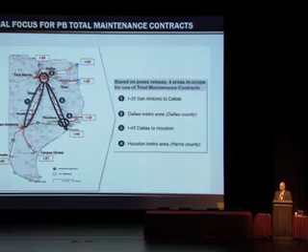I want to bring you up to date on where we're at with our performance-based total highway maintenance contracts. This is the initial focus area based on a joint TxDOT McKinsey study on which highways and areas TxDOT is going to put under performance-based contracting for routine maintenance on highways.

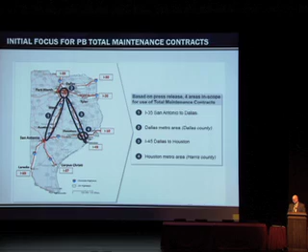You'll see from the bottom right, you're starting off in the Houston metro area, then going up north towards Dallas on Interstate 45, then the Dallas metro area, and then down towards San Antonio on the I-35 area.

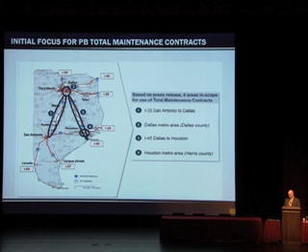This is just a little bit different map. Okay, just to tell you, if you're not aware, we have this section of Interstate 35 that's been under contract.

I believe it's on its third generation since 1999. This is the current contract in Austin, Interstate 35 through the district boundaries, a short section of 290, State Highway 71, Loop 1 or MOPAC, and US 183.

San Antonio metro area will take care of Interstate 35 through the district boundaries, and then basically all the major roadways and thoroughfares within

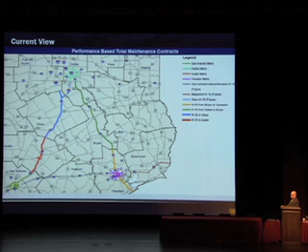Loop 410. Over here we've got a potential project on Interstate 10 from San Antonio over to almost Houston, possibly all the way to Houston. We have a current contract in Houston for all the major metro areas within Beltway 8.

This yellowish area is Interstate 45. It was a current contract that went under contract, I believe, in August 2012. And then we have this Interstate 45 up to Dallas I spoke of earlier, and the major thoroughfares within Dallas County up there in the Dallas area.

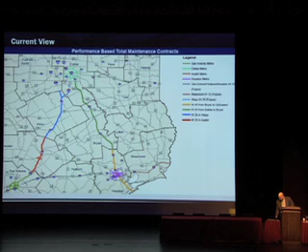In Austin, we let the contract in the metro area in December of 2013. We had, I already explained, the different roadways. This section, if you can see it well enough, there's a section of roadway under contract right now on MOPAC. So not all of that is in the routine maintenance provision of the contract.

It is a CTRMA MOPAC improvement project that's going underway. So the southern section of MOPAC is within this contract, but it was let in December of 2013. ISI Contracting got the low bid of about $11.4 million of the 4 bids received, 19% plus under the engineer's estimate, and $4 million under the second bidder. Work started on that in April of 2014.

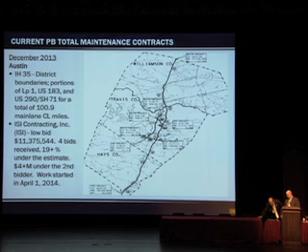January 2014, we let the Houston project, everything inside Beltway 8. Texas Tree and Landscape got that low bid. Of the 3 bids received, 14+% under the engineer's estimate, $6 million under the second bidder, and work started on

June 1st. Subsequent to the letting process, Texas Tree and Landscape -- a lot of y'all may have heard about this happening throughout the state -- they assigned the contract to DBI Services, and DBI Services started performing on contract on June 1st of 2014.

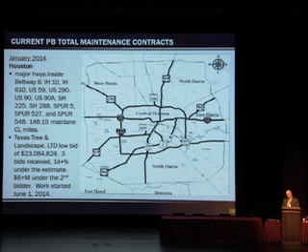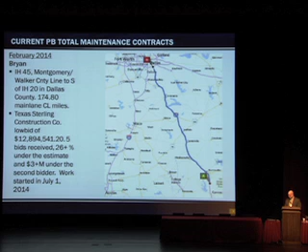Then in February of 2014, we let the Bryan contract, which is IH-45 from the Montgomery-Walker County line up to almost Interstate 20 -- really Millers Ferry Road, just south of the Interstate 20, I-45 interchange. Texas Sterling Construction had that bid at $12.9 million, 26% under the engineer's estimate and $3 million under the second bidder. Work started on that July 1st of 2014.

Then we had the Dallas contract, let in July of 2014, the most recent one to date. That's basically all the major thoroughfares inside Dallas County, Interstate 20, 30, 35E, all the major ones -- 160 main lane centerline miles. Amey Consulting USA Incorporated submitted the lowest bid, $19.3 million, 11% under the engineer's estimate, $2 million under the second bidder, and work will start November 1st, 2014.

How many people have heard of Amey Consulting USA Incorporated? They are a company that does a lot of asset management in the UK. When we started this program in the summer of last year, there was a tremendous amount of interest, and they were involved with us quite a bit in the development of this performance-based spec. So this is going to be their first step, and they're partnered with Weber on this project.

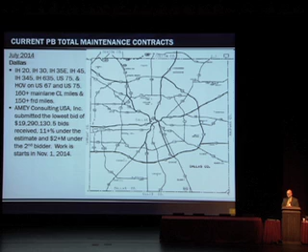Okay, this is a summary of everything under contract. We don't need to go through this individually, but we've got almost 1,400 total miles under contract for $73.3 million. You can look at the variety of cost per mile if you want to look at it that way. This also includes approximately 20% of other bid item work to perform some preventive maintenance type projects. It varies across each contract -- could be seal coat on one, bridge joint repair on another, pavement repair on another. We have additional bid items in there that is above and beyond the normal routine maintenance expectation.

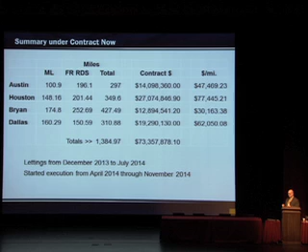The way we have this set up is it's a performance-based contract. If we say the contractor needs to do something in the contract, then they need to do it or else they don't get paid for it. This is a summary table of how the contractor will be performed, broken out into three categories: quality, safety, and timeliness.

We use the condition assessment scoring at a rate of about 10% of payment, and each of those element or component scores are broken down 10% each, with the overall condition assessment also contributing 10% of the payment. Then we have safety key performance indicators and timeliness key performance indicators, for a total of 100% payment. That's the breakdown of whether and how they get paid if they do everything they need to do.

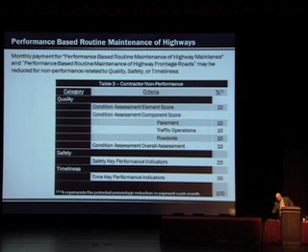So again, it's a 50% total potential penalty on quality. Included in that is a requirement to develop and submit a quality plan within 60 days of time starting. If they don't, there's a 5% reduction in pay for the first month, and then 10% after that. This quality plan is to be based on and compliant with ISO 9001-2008.

To date, none of the contractors have failed to submit. There's also potential for a reduction in pay based on our audit of their implementation of the quality plan. The condition assessments I explained earlier are basically similar to TxMAP assessments, and we do a quarterly assessment throughout the year that may determine whether they get a reduction in pay.

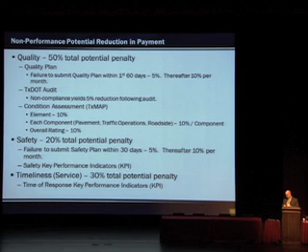The total safety percentage reduction in pay for meeting the key performance indicator requirements is up to 20%. The timeliness-related KPIs have a total 30% potential penalty in pay reduction. Here's the table — if you're at 90% or below, there's potential for reduction in pay; if you're at 90% and above, there's no reduction for timeliness.

But this shows a possible incentive in the safety area. If you're working on a safety KPI, you have the potential of up to a 1% increase in pay for that month.

That 0.05 — just to highlight, that's an error. Although it's under contract right now in at least 3 contracts, after that was discovered it was moved to 0.5%. Just being completely open with everybody.

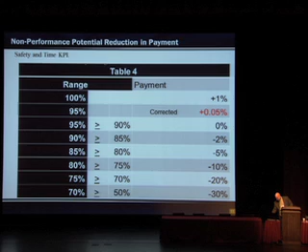This is the performance today of key performance indicators — a little graph of how each of the projects is going. You can see the Bryan project in light green; they've been consistently above KPI performance levels of 90%. These are separated into safety and timeliness KPI.

The dark blue is the Austin contract, and you can see the variability throughout the start of work and how that's been going. It appears, though I can't see it clearly from here, that since June everything has been positive without any negative deductions.

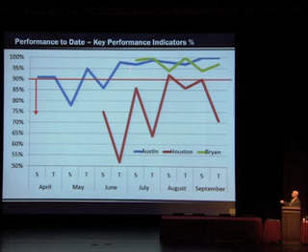Houston is a little different — there's been some downs, a little bit of ups, but on one occasion it wasn't below the 90% level. In other words, they didn't receive a deduction in pay for that.

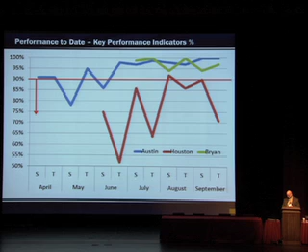As far as the future goes, we had hoped last week to advertise the San Antonio Metro contract but didn't get there yet, so we're hoping to advertise this week if we can get some things completed for the December letting, for an April 2015 start date — trying to give contractors time between contract execution and the initial start date since there is some mobilization effort to get started.

Yoakum has a possible I-10 contract, as I pointed to earlier, in the spring to summer 2015 letting. I still need to meet with the Yoakum District and have some further conversations about that.

Beaumont Interstate 10, which also includes some other portion of Interstate 10, is looking at somewhere in the neighborhood of a September 2015 letting. For Waco and Dallas Interstate 35, Tony and I have talked several times about what the right timing is.

Everybody's probably aware there's construction going up and down the area, and there's an existing contract. We're going to get together again and touch base to figure out what the right date is going to be. That includes Dallas Interstate 35 up to Dallas County, potentially — that's still under further discussion. And then other contracts as requested and approved.